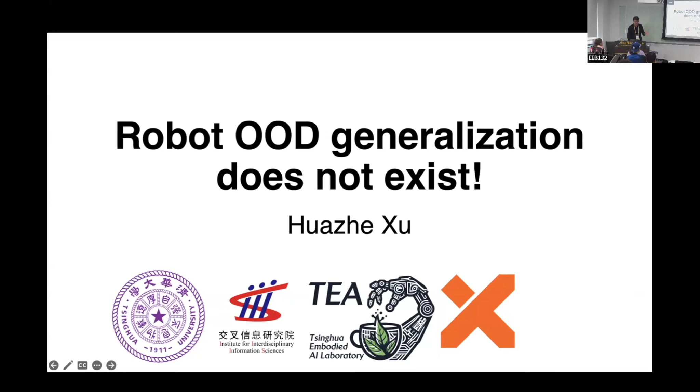So OOD is a fancy word, right? When I see this word, I think about true intelligence or AGI, etc. But when I work on robotics, I find we actually cannot generalize to OOD tasks. Everything we can generalize, or claim we generalize, is because we use some way to convert OOD things into ID, in-distribution tasks. This is the only way. That's my argument. Maybe it's too strong, but you can criticize.

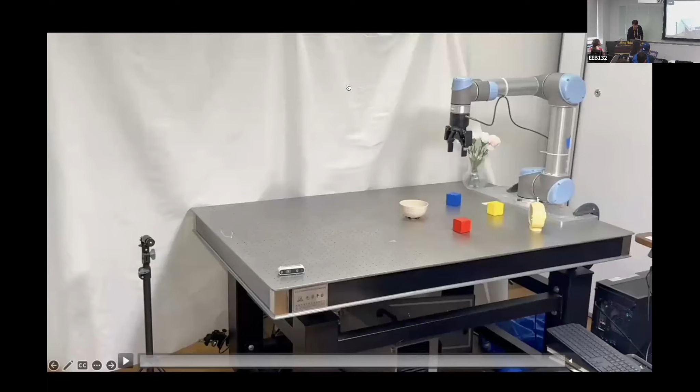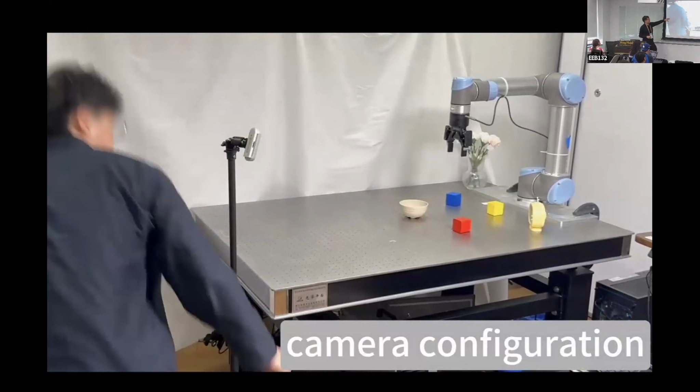So let's see the results first. Everything is only trained in one simulator, but when we test it in the real world, we find it is very robust. We don't need to calibrate the camera. You just use a RealSense, plug it in, and everything is done. You run your policy and it successfully picks up the red cube.

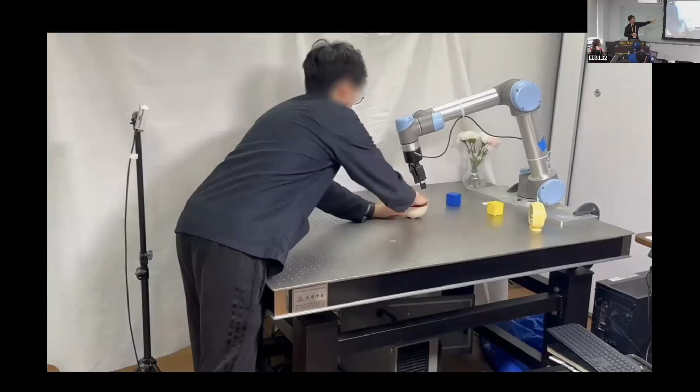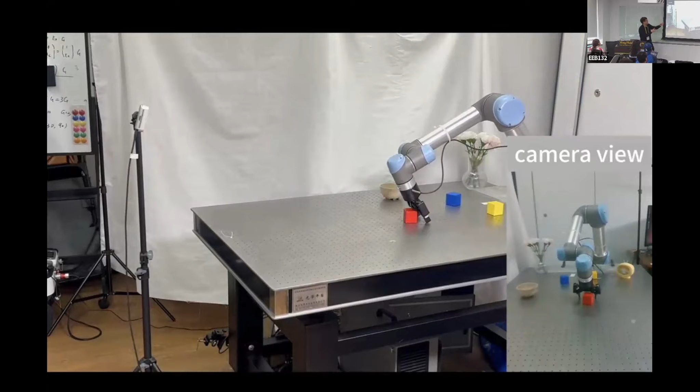And next is my favorite part. You reset the scenario and ask the robot to perform the actions again. But in the middle, he will shake the camera, and you will see even with a very shaky camera, the robot can still generalize. It's very robust.

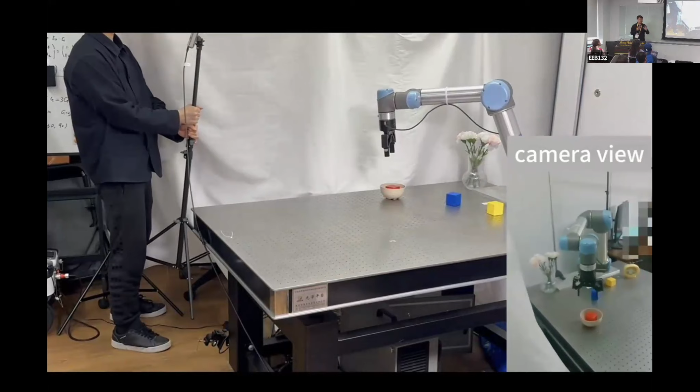Of course, we also use the same model. We didn't train another model, the same model in the kitchen sink. And we find it can generalize to an apple. Of course, it suffers a little bit, struggles to pick it up, fails a little, then tries to move and pick it up.

So it seems like OOD generalization, right? Seems like we can generalize to super challenging scenarios. But let's look at the method.

The method is very, very simple. It's just like two cameras during training. When you're in the simulator, there's a fixed camera in the front, and another camera trying to move all the way around the object or the target area. You use some contrastive learning to learn a representation between this data, so it can generalize to different camera views.

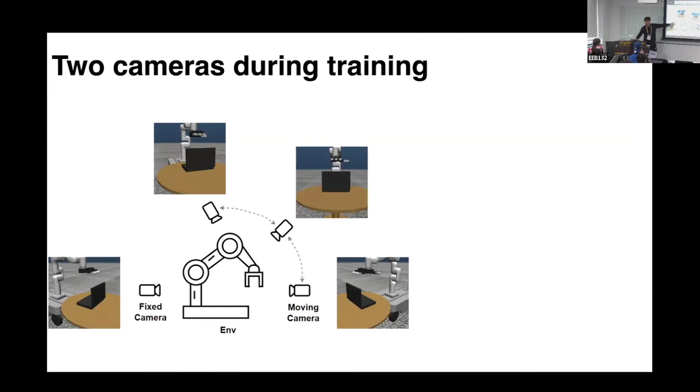Yes, it can. But is it OOD generalization? Task-wise it is, but method-wise it's not, because we have this kind of data augmentation inside our simulation. But more than that, we have a lot of other data augmentations to make it work. We have random translation, that's normal. We have random crop, that's normal. We have mix-up, that's very important.

We use Places365, the dataset, combined with our real robot dataset. There's a mix-up technique to make it generalize to all kinds of backgrounds. We also use SRM, a spectral augmentation technique. You convert everything with Fourier transform into the spectral domain and then augment inside the spectral domain. So we add so much augmentation into this method so that it can generalize to all kinds of things.

So this is our first method, try to add data. Maybe some sort of blindly, because these things are just blindly adding more data, hoping it covers everything. And these things are because we know the robot is very fragile against different camera views, so we purposefully add this.

Yeah, and the other thing, maybe some of you have already heard this in the conference, and the first author is here. So DemoGen, we also generate some data. So we can augment data, we can even generate data. In DemoGen, we have action generation with TAMP, and then visual observation generation with 3D editing of the point clouds.

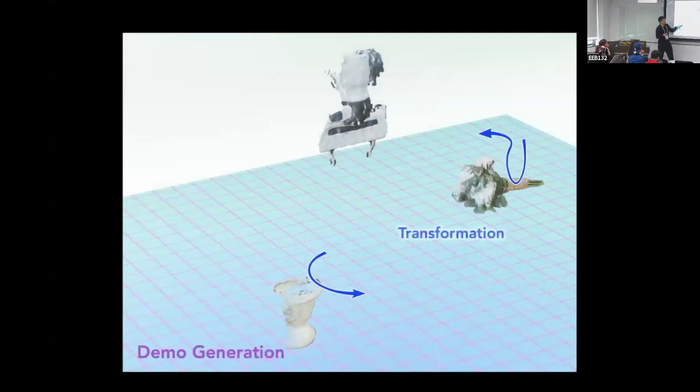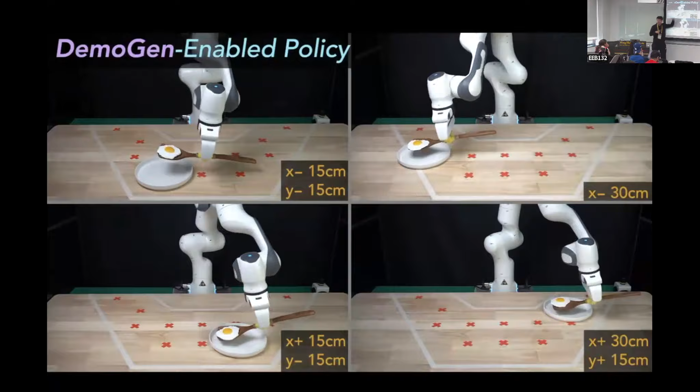I think, well, this video is still... Yeah, so it's very simple, right? You pick up this thing and put it here. After you do the point cloud segmentation, you can move around it, and then you just do motion planning to pick up things at a different place. Then you can generalize to the whole workspace for every task with one single demo.

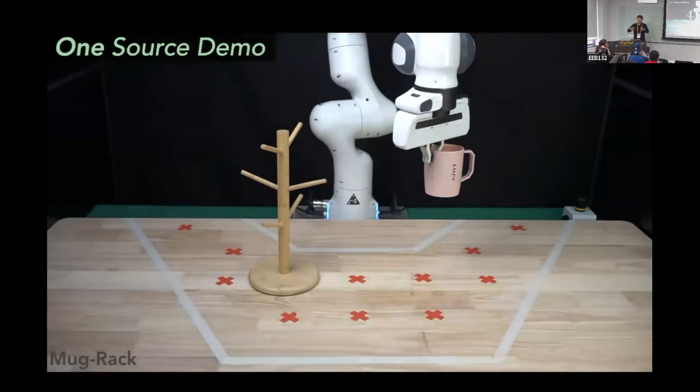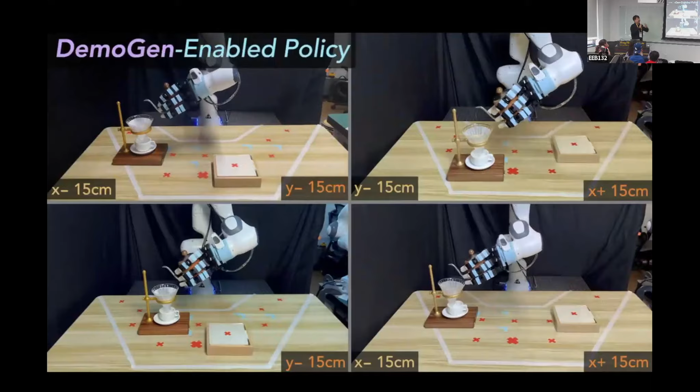But is it OOD generalization? I only have one demo, but I generalize to the whole tabletop? No, because we generate all kinds of demos all over the tabletop, so it can generalize. So it's still ID, because we add data to make OOD locations, OOD space, ID, right? So this is DemoGen.

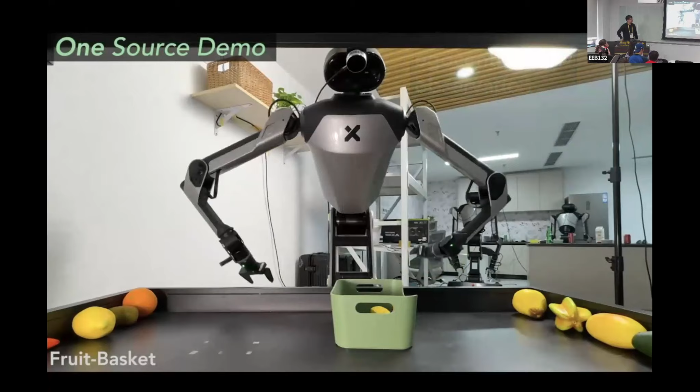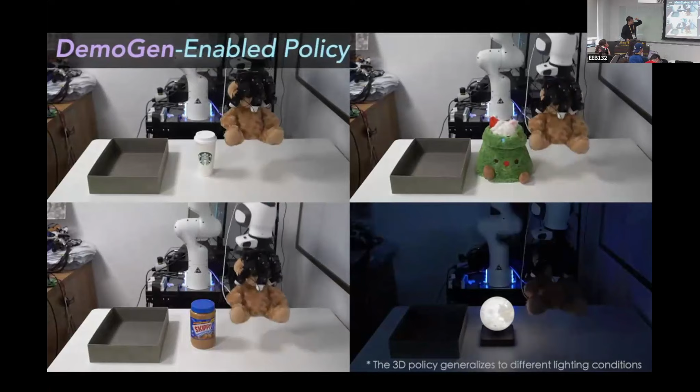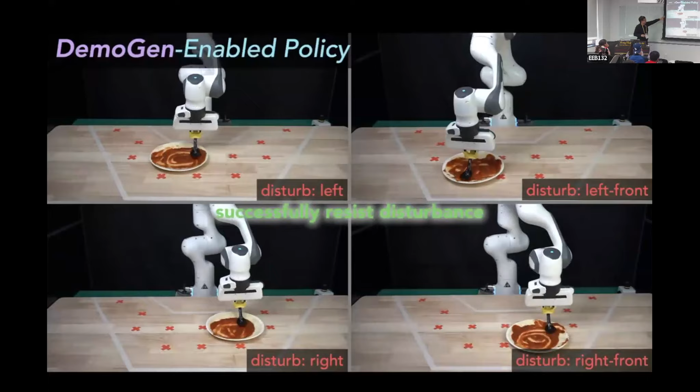We also try bimanual, and the interesting part is it can generalize to different rotation, different orientation. That means it's not only robust to translation, but also orientation, and it's robust to disturbance. When we generate a lot of data, it can mimic human interrupting the robot, and everything is ID. So when doing this, maybe in the future we should have an OOD task in mind first, and think about how we can generate or augment the data to make it ID.

The second approach is we can use powerful tools such as foundation models. So in this case we still want to solve that OOD task, but the foundation models have seen a lot of data already, maybe there, maybe there, maybe there. Our foundation model is trained with large scale internet data, so when we try to solve this with only a few demos, it's not so hard for them because they're trained with a lot of prior data that is near those points.

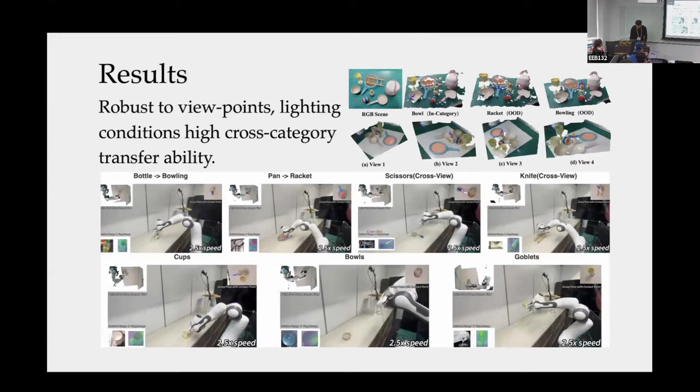And Robo ABC has recently been improved, called DenseMatcher. Instead of having a 2D correspondence from a 2D diffusion feature, we have a multi-view version of feature extraction, then use FeatUp to get high resolution features, and reproject all the features onto the 3D mesh, so we can have correspondence between two different onions.

There are no two onions that are the same in the world. So if you already know how to cut one onion, you should know how to cut the other. But for robots, when they look at the other onion, it's OOD, because it has a very different shape or maybe different color. But with foundation model features, we find they have very strong correspondence.

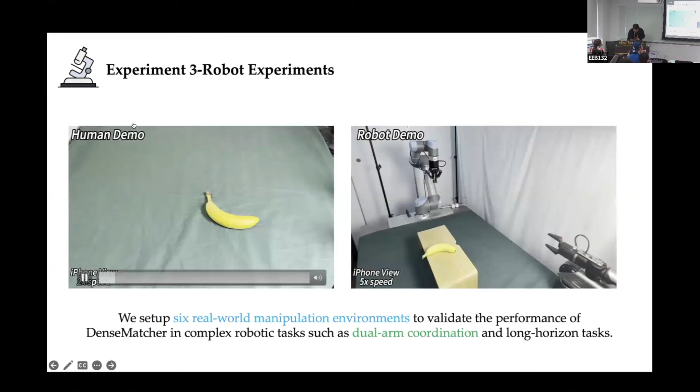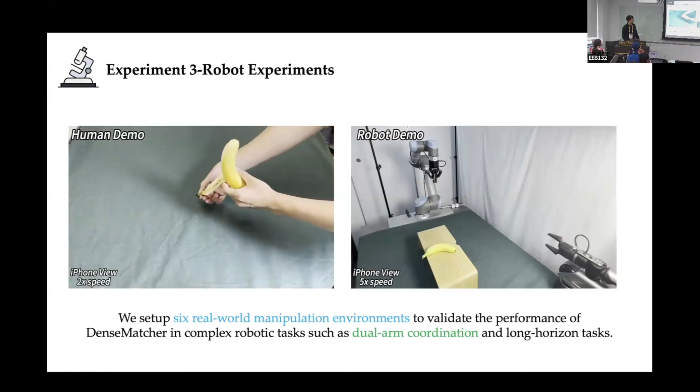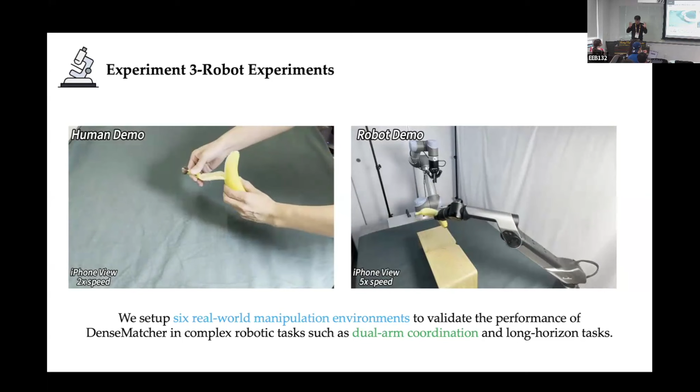Let's see some video. On the left is the human demonstration trying to peel the banana. And on the right, by only looking at this video, the robot can actually generalize to a new banana. Although they look similar, it's new - trust me, because it's already peeled. So we say the robot can actually generalize to OOD tasks with the help of foundation models.

That's another claim. But the foundation models use a lot of data, so it's still ID.

For example, this is an old paper also from our group, called USEEK - correspondence from equivariance. In USEEK, we are trying to manipulate a category of objects, for example a category of airplanes, toy airplanes. And in this work, we first have some key point detection.

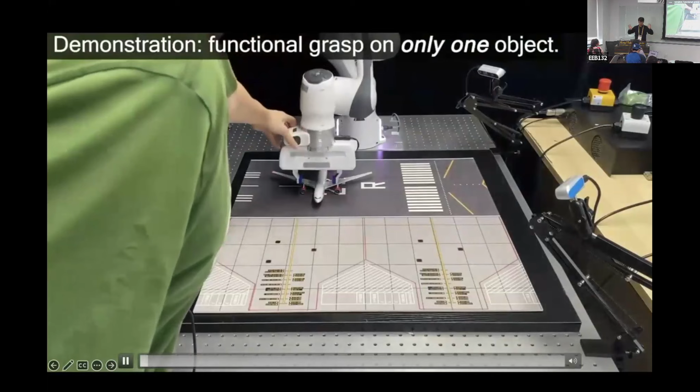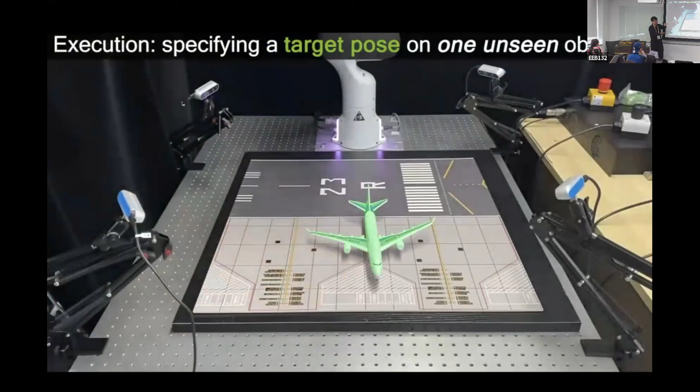So in this case, we also do some real robot experiments, and my student Zhe Cheng is trying to give one demonstration, maybe half of a demonstration, just showing one grasping pose. And then when the airplane is in a different location or a different pose, the robot arm can just deal with it.

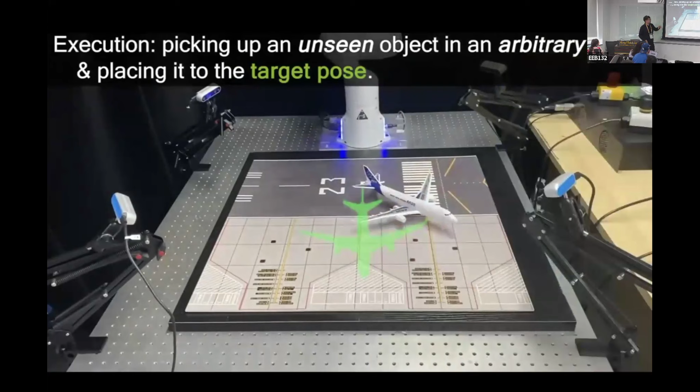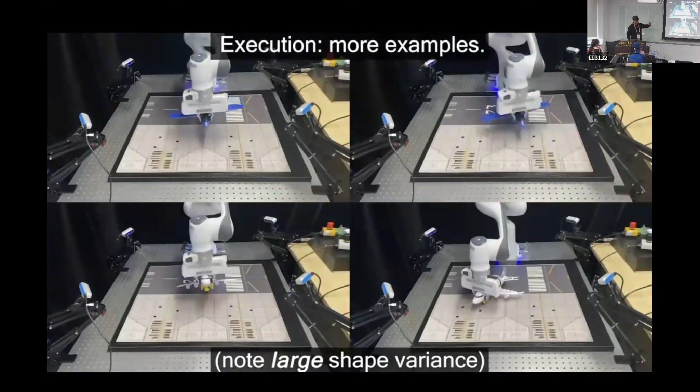So any rotation, the robot can deal with it because it's equivariant. And there are more videos trying to show that if you change the color or change the type of airplanes, it all works.

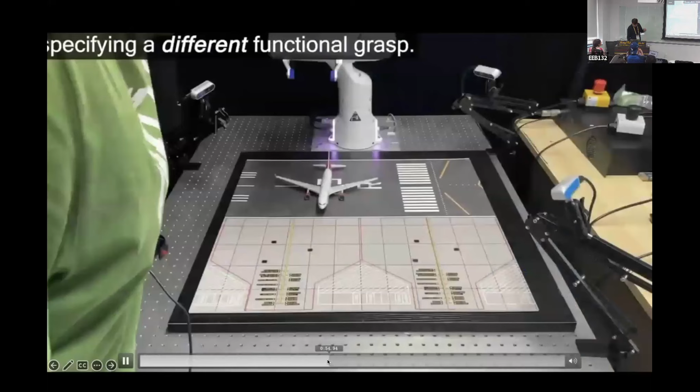I think I have some more demos. Let me jump a little bit. In this case, we also tested on knives, and with half of a demo, the robot can actually grasp the knife and cut the tofu.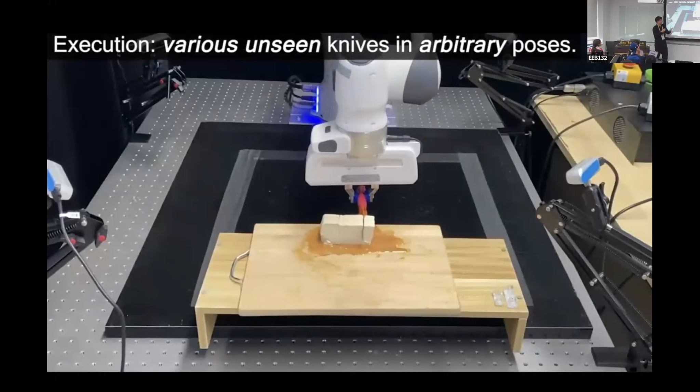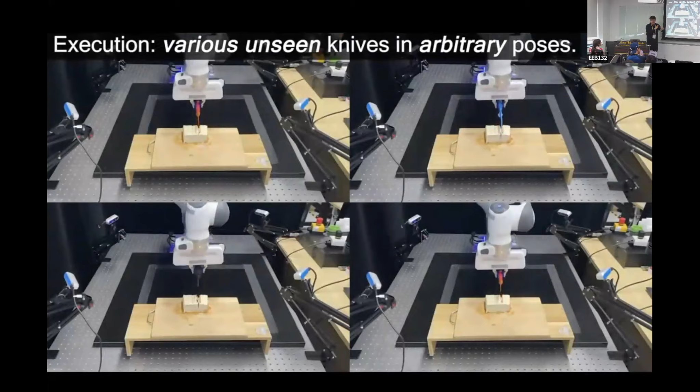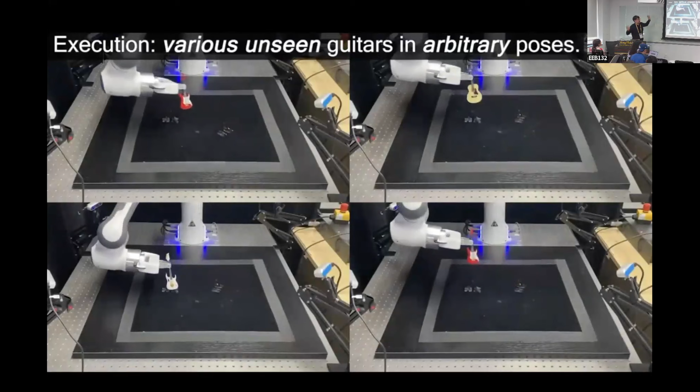With different colors, with different orientations of knives, we can do the same. So it's sort of generalization. According to our definition, everything is OOD, but actually it's ID. You just didn't see it, right? And this is a guitar toy placement example.

So later we have another paper trying to follow this direction called Riemann. In Riemann, we have another equivariant neural network, also with the input in a point cloud format, and we have a saliency net trying to do automatic attention to the target location. So this kind of equivariant neural network is also robust to all kinds of orientations. I won't go into the details, but I will just show you the video.

I also recommend you read two other papers, not from my group. One is called Instant Policy. I think they also leverage graph or topological similarity to try to generalize zero-shot. And the other one is called Equivariant Diffusion Policy. I think that paper won the best paper at CoRL last year, and that's also another equivariant network. So all these works are trying to say if we have the correct neural network format, we can actually convert everything into the same problem.